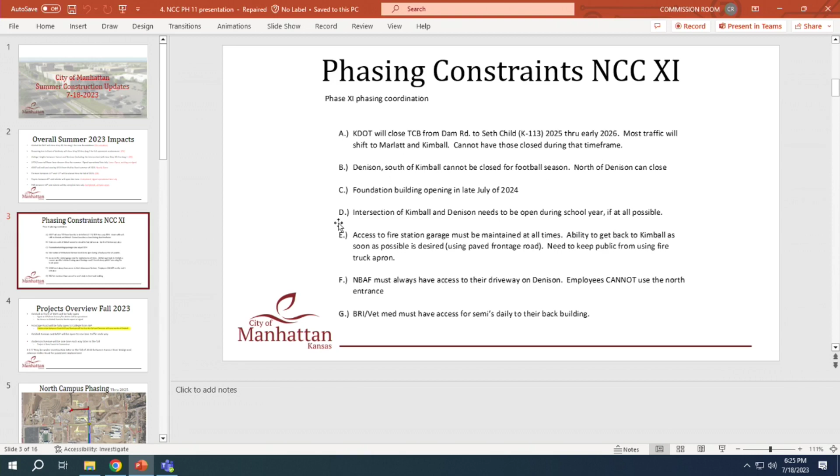And then BRI Vet Med, they actually have semis daily that come back and go to their back building. So that posed another significant challenge with trying to get semis through their parking lot. When we actually met them on site, we met them on site 3 times now. They probably had 5 to 10 deliveries in the 1 hour that we were there each time.

So again, the way we are seeing the fall 2023 impacts, we believe Kimball will be completely open throughout the entire fall. The frontage road behind or between Grain Mill and Denison, we're here tonight to talk to you about getting authorization to build that this fall, and then work on Denison also north of Kimball. So we'd have those 2 pieces open, and then Kimball would close January 1 of 2024 through August of 2024. Again, get that Kimball Denison piece done prior to the KDOT closure.

Again, Kimball Avenue, GMP, Grandmere Parkway will be 1-lane traffic each way this fall, which is also a big corridor. Kimball carries a lot of traffic.

And then also, KDOT is going to be reconstructing K177, the bridge south to Johnson Valley Road on K177. That piece will be reconstructed this fall. They have a bid in August, with an early and a late start date. We've encouraged them to start as late as possible due to football traffic. Their late start date is like December 15th. We've asked them to start as late as possible so we can get through football season. That last game, I believe, is on Black Friday, so it's November.

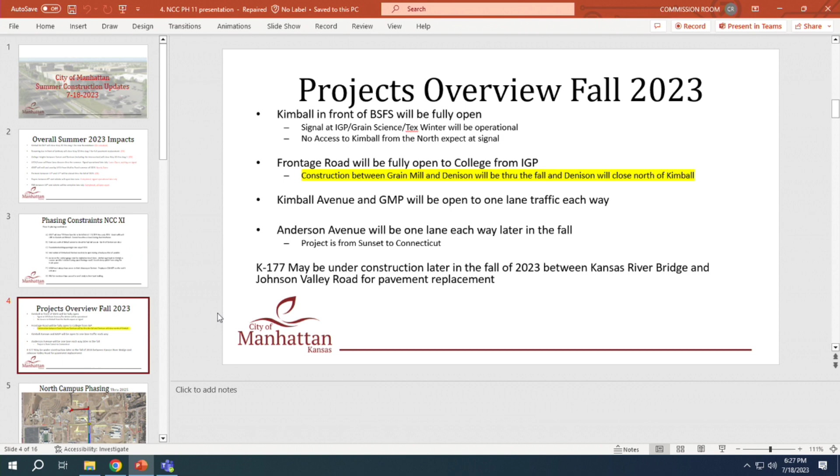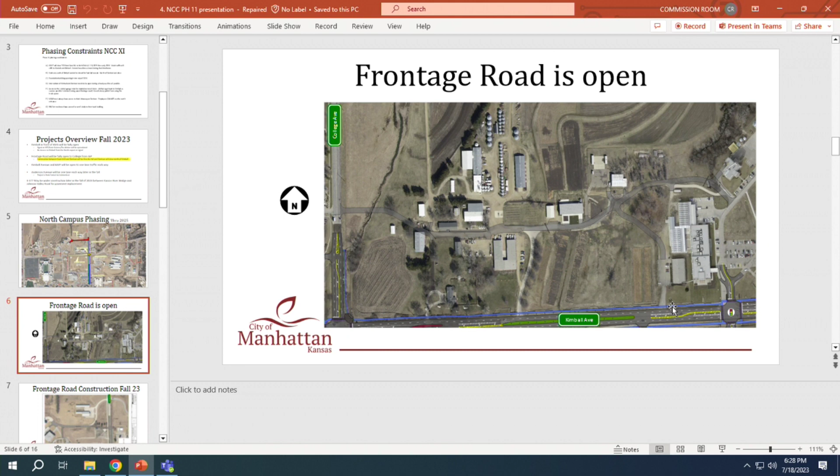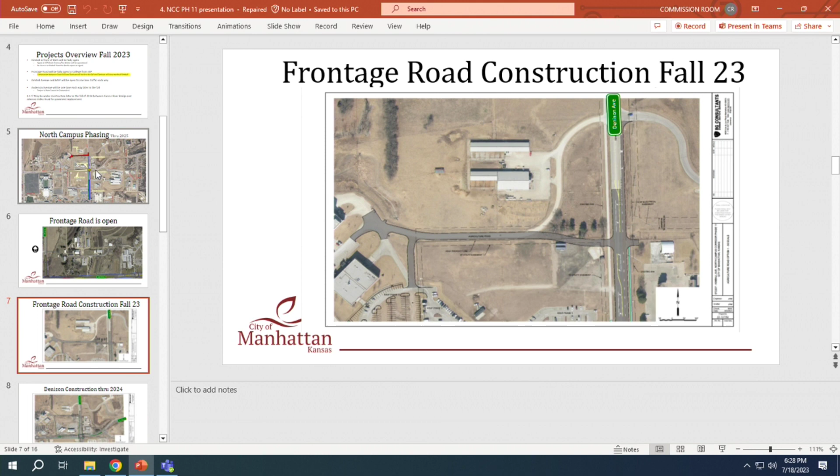This is the piece we're looking at building this fall with your concurrence, this piece here. Going back to this map, this would allow MFD to come out, go up Denison, down the frontage road, to the signal, and leave. Without this red area done, MFD would have to go to Denison, all the way to Marlatt, over to College, and back down to Kimball. So this is the cut-through piece.

So, like basketball game traffic who park on the east side of the stadium or east side of Bramlage, they're not going to be encouraged to go up through that way to get around to East Kimball, are they? We met with KSU PD and athletics a couple weeks ago.

We're going to try to bring them down here, then through Olympic, and then through the back gate. That's the route they're looking at — coming in and going out. That's the route we're looking at as far as getting them in and out.

Again, this intersection would be open, so you could come down, go through the intersection, through the back gate at Olympic. We do have another meeting August 2nd to finalize this.

Once the frontage road — or once this area in red — was complete, we would start on this little piece of Denison. We've broken this into two pieces so that as they're working on the north half, MFD could still access Kimball and go down Kimball. Then when they're working on the south half, which would just be a small piece, they could go up Denison, out the frontage road, and then down.

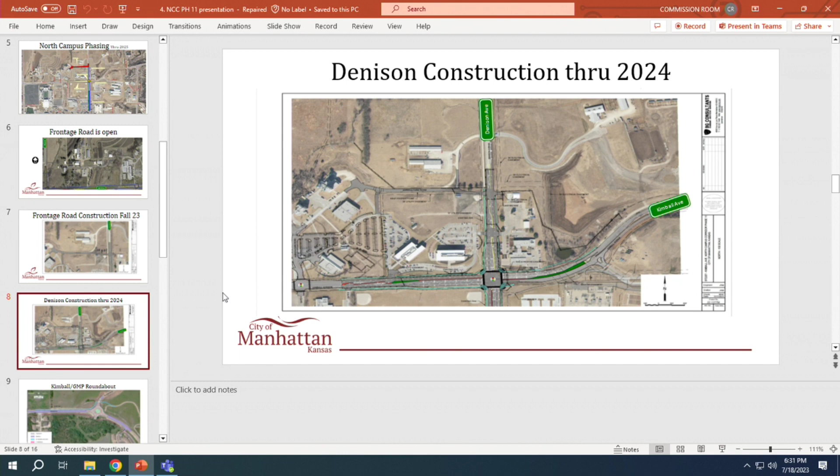This will be stop-sign controlled, so you'll come down GMP, stop, then make your right or left. We're going to assign that 20 miles an hour because it's a work zone — fines double. We've already talked with CPD about enforcement; we're going to hit that hard because the other legs of Kimball are 40, so you'll have to go from 40 to 20. Make sure you drive slow since it's a construction zone.

There's a lot of equipment around. You're going to continue the marked detour for most of the traffic, aren't you? No, we're not taking the detour — we're going down through it instead.

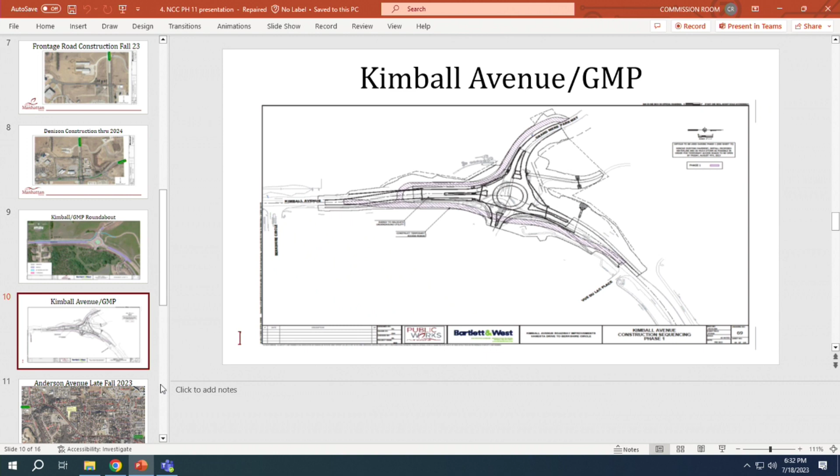Are you totally reconstructing it? Complete rebuild, yes. It's actually a water line project that has driven this. I'm sure you all see Anderson, there's potholes everywhere. So that's what really drove it, but while we're doing the water line work, it's a complete rebuild.

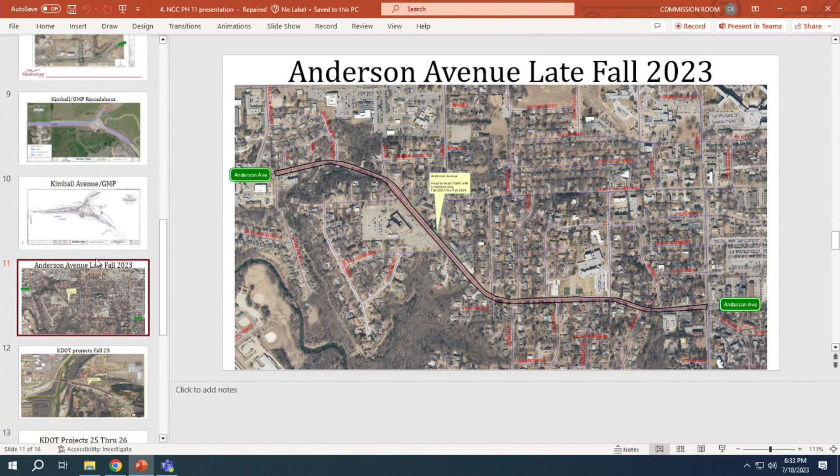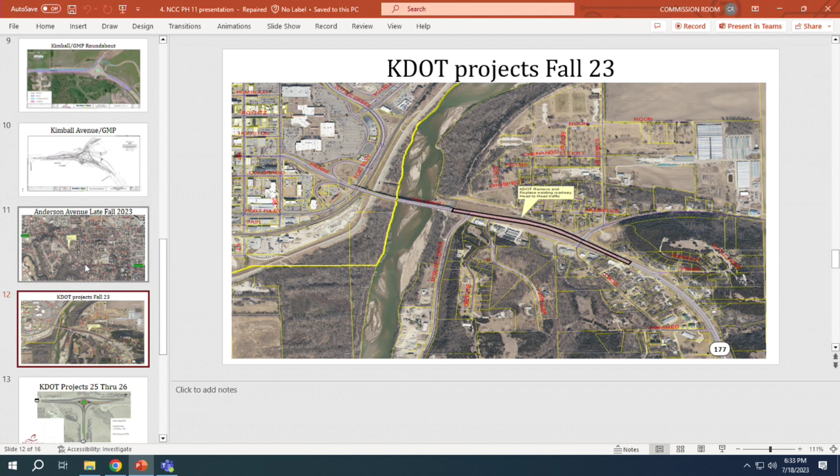Again, our KDOT projects this fall. This is the bridge for 177, this is Johnson Valley Road, so this will be head-to-head traffic through this area through the fall and into next year. Then our roundabouts to the north - these drawings are from our Seth Child corridor plan. I don't know if this fly-through lane is actually going to happen. There was some debate about taking that fly-through lane out and just running it through a roundabout. I don't know where KDOT landed on that yet, so I don't want to promise it's going to happen because I'm not sure. But this is that project. When you say head-to-head, you mean 2-lane? Yes.

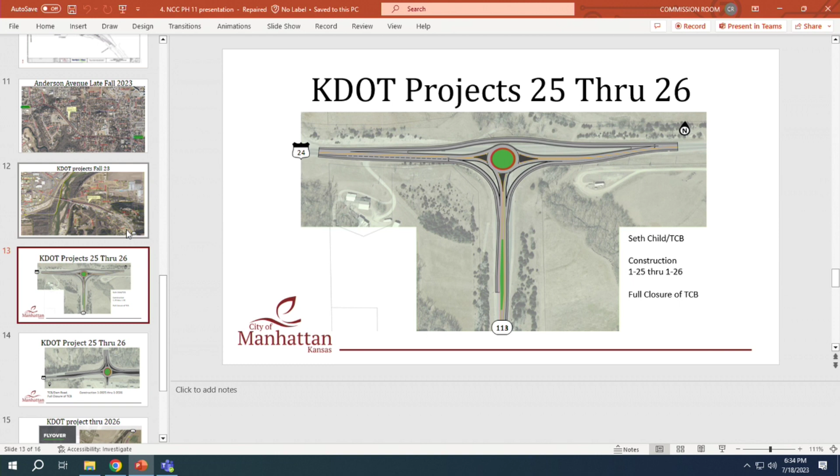So there's the Seth Child project, January 25 through January 26, full closure. Everything from here, this is the dam, to here will close. You'll be able to come eastbound and go southbound, and northbound to westbound, so you'll be able to come in and out of the city, you just won't be able to access between those 2 points. There are two roundabouts, and they're both being done at the same time. You'll be able to go westbound to northbound, or southbound to eastbound, but you won't be able to go west - this leg here will be closed.

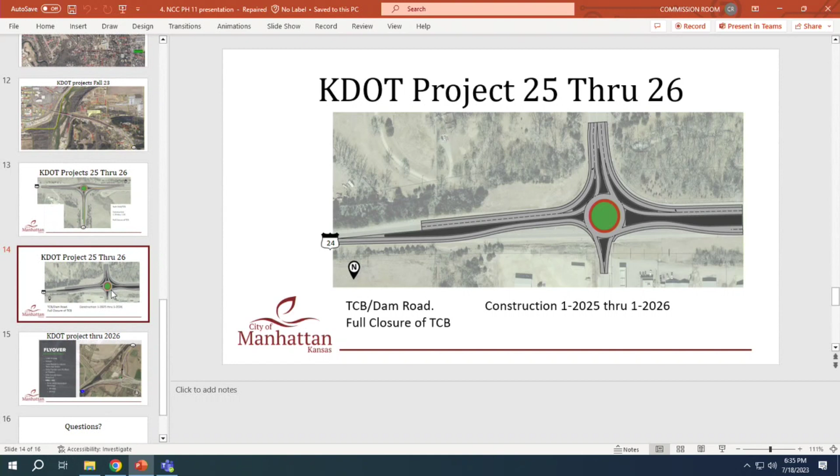Then we have one more project sometime in 2026, funded by KDOT. It's actually a flyover bridge or flyover lane that comes out of Fort Riley Boulevard, the Marshall Gate. Currently when you come down the bridge you have to merge into I-70, go about a mile, then merge back out to get up the bridge. That lane is going to continue all the way through now. So when you come down the bridge, you'll get your own lane eastbound all the way to here, then take a bridge and go up and over I-70 and touch back down on K-18. So when you leave Marshall Field, your first stoplight will be Richards Drive.

Very similar, a very smooth flyover type. Rob and I sat in a couple meetings with KDOT on this - they had 4 or 5 different layouts, and we were very happy they settled on this one. They really didn't have the budget, but they saw it was a great project and came up with the extra money. For game day traffic this is going to work great, and for Fort Riley too - you'll come out, get your own lane, and won't see a stoplight until you get to Richards Drive. That's set for 2026.

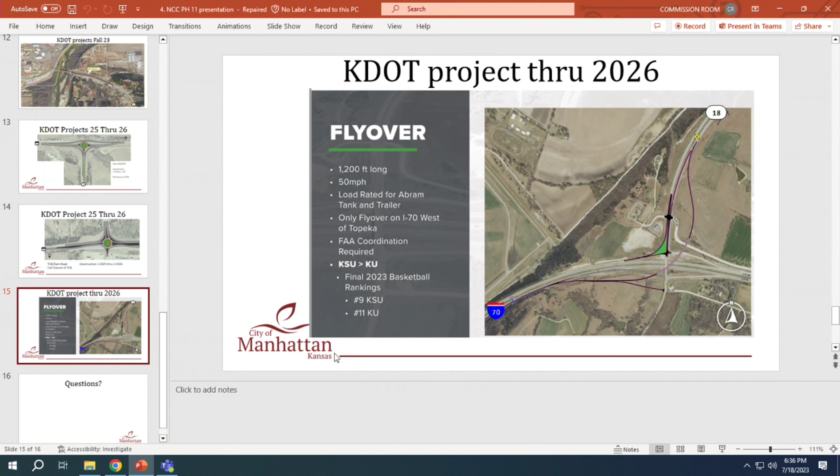With that, I'll stand for questions on any of the projects we have going on.

When the levee project is over - Casement Road is taking a beating. We actually talked about some repairs on Casement. We actually have some repairs on Hayes Drive ongoing right now. We had a discussion today about knocking out some of the worst sections on Casement, concrete-wise, prior to school starting. And just a reminder, we did award an asphalt mill and overlay - a 2-inch mill, new asphalt surface - for the asphalt segment that's in there as well. So right now we're kind of waiting on Schilling and their schedule.

They're obviously spread pretty thin between KDOT and everything else going on. I think Casement's taking a beating because of the detour, more traffic.

So I'd hate to gum that up too. There may be an opportunity when we do that safety grant to do some pavement repair too, while we have the intersection closed down and getting some traffic control, potholes too.

We're definitely gonna address the asphalt section this year, and then some of the worst concrete panels between now and when school starts. We're not gonna be able to do a complete rebuild, I just expect pothole repair. As I drive it, I just think it's deteriorating, so after the Hayes levee is finished, it'll be in pretty bad shape.

It's kind of the same concerns we have for Kimball if we don't get on Denison and Kimball before KDOT. I don't know that Denison and Kimball will make it through that detour. I'll double my traffic counts on Kimball for a year and a half while KDOT's closed. I don't know if Kimball's gonna, it's in pretty bad shape.

And Denison was done about the same time that Amanda Arnold was, and they didn't hold up. Amanda Arnold didn't hold up well, and it's showing its age. I noticed the corners on the concrete pieces.

If we don't approve this tonight, it'd probably be 2027 before we got the Denison and Kimball, and I don't know if Denison and Kimball would still be there in 2027, would hold up. We'd probably end up putting $250,000 to $500,000 of temporary asphalt on it just to keep it together so I can get to 2027.

All righty, thanks, Brian. Any other questions right now? We'll throw it open to public comment.

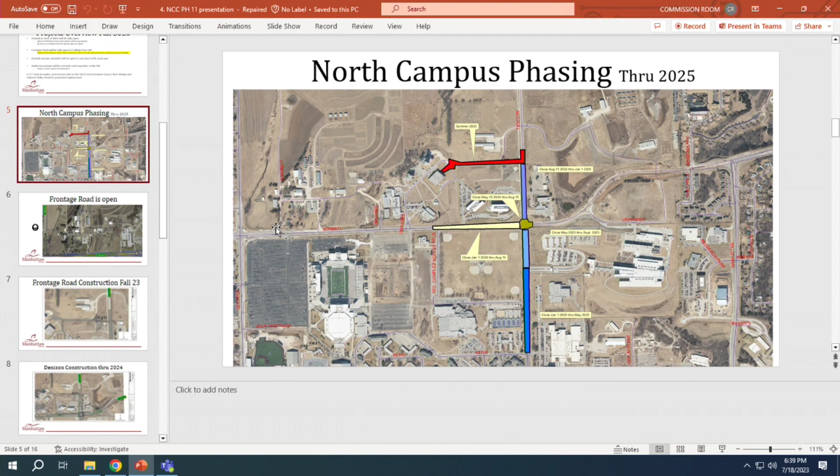If anybody would like to comment on this, what we're gonna be voting on potentially is the contract to build the frontage road off of Denison over to the grain science area. Hearing no comments, I will close public comment.

And commissioners, all right, I'll read the motion. You ready?

I just want to make a comment. I appreciate the effort on looking at all the detours and possible things, because people are always saying that we don't do a good job at that, but I beg to differ. I think you have done a good job on that, and we gotta fix the roads, but as you pointed out, we can't do them all on the same day. So this is well thought out, especially integrating it with KDOT's project, so appreciate the work on that. We have to race in the summer and do as much as we can, because once school starts again, it's worse by 2 or 3 times.

I move that we approve an alternative delivery method per Charter Ordinance Number 62, Section 3, to authorize city staff to finalize and the mayor and city clerk to execute a construction contract with Ebert Construction of Wamego in the amount of $2,943,360.24, and approve resolution number 07-1823C, authorizing the project and issuing bonds for a portion of the North Campus Corridor Phase 11, Project ST 2207.

All contingent upon the city obtaining the necessary right-of-way from Kansas State University to accommodate the extension of the Frontage Road, and also contingent upon a legal determination that the city has bonding authority for the project to finance the construction. If these contingencies are not met to the satisfaction of the city legal staff, the mayor and the city clerk shall not execute the contract, and the resolution shall be void.